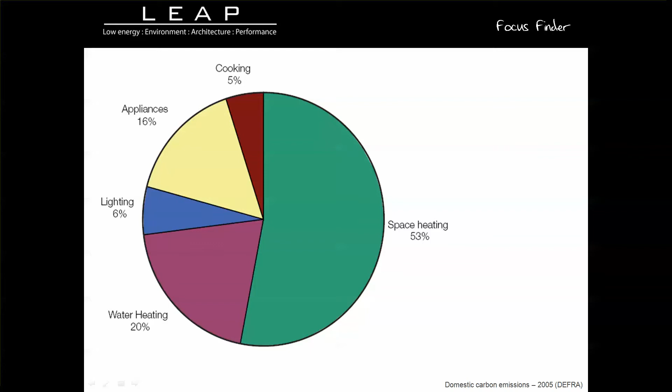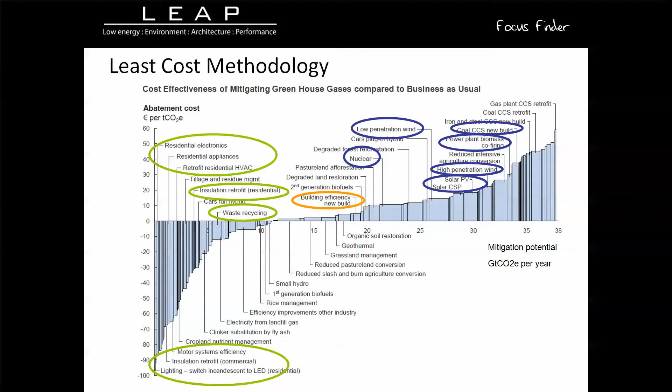And this can start to become a way of thinking about how you can actually develop some sort of fuel policy and fuel methodology, a way of reducing carbon emissions. So what you really started to see is that from the left-hand side of the graph to the right-hand side of the graph, the life cycle costs get reduced. So you start on the left, you use all of your energy efficiency measures, that releases capital, and you're then able to invest that into the fabric of a building or other carbon emissions reduction kind of approaches.

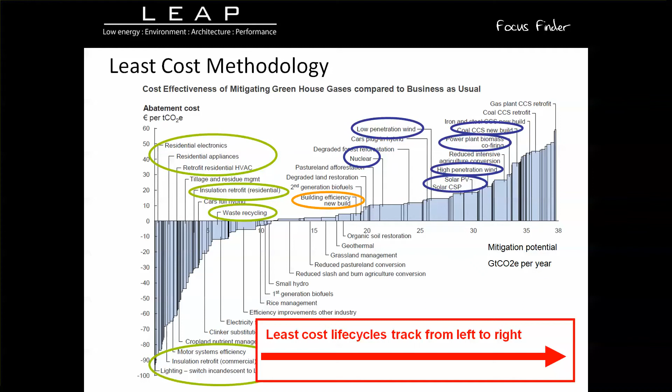So really the first thing to do is to retrofit buildings, of course, and pay close attention to that, and planning not just for heating but for electrical energy use and the likes. But when new buildings are being constructed, they should be made as energy efficient as possible.

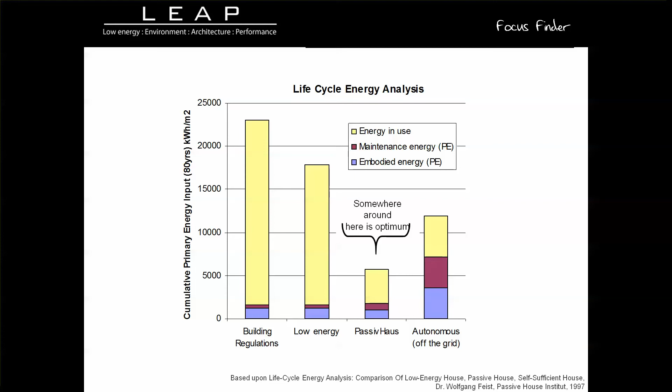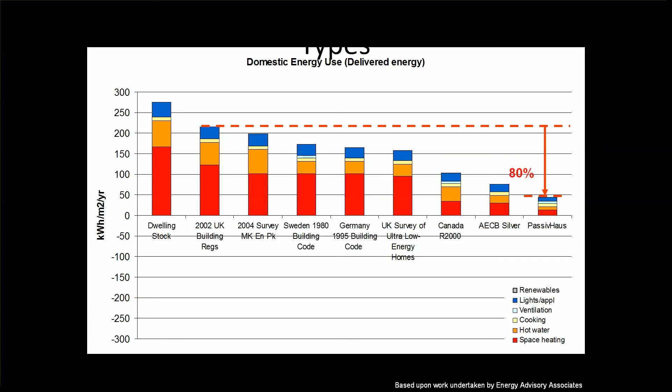So once again we've got taking on board the lessons that we learned from that McKinsey study. What we find is that we're not only reducing our energy use by 80% compared to 2002 building regs, and actually more or less, strangely enough, still compared to current day building regulations as well. And then what you're getting is least cost life cycles tracking from the left hand side towards the right hand side.

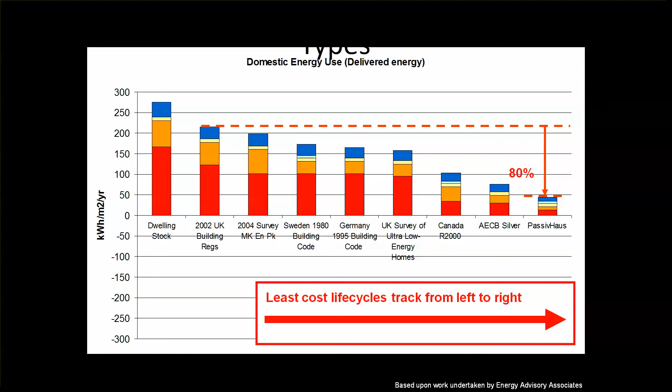When we start to look at renewable technologies, if you believe in what I feel is a mythical kind of zero carbon status, because basically it's an accountancy game, it's not reality. Until the national grid is completely zero carbon, then you'll never get a zero carbon building. If it's an off the grid building, then we've already looked at that.

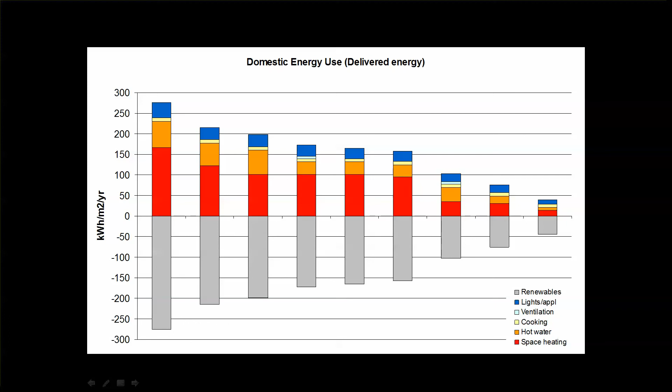Okay, so where do we go? Well, the more energy that you use, the more renewable technologies that you need to offset your carbon emissions, and that costs money. PV and the likes costs an awful lot of money, and you may be able to tap into various different subsidies and the likes that are around, but at that truer level, you're having a subsidy from somebody else to achieve something, and it's questionable in terms of that overall macroeconomic scale. And the other thing to think about is the maintenance issues associated with the bolt-on technologies.

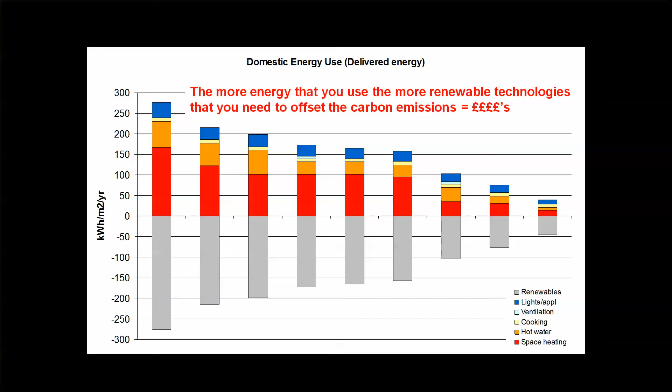And other renewable technologies. I would tend to argue that we should be sticking to something that's a little bit more simple and easy to maintain, because we've all got busy lives and the last thing we want to be doing is fiddling with other engineering bits of kit, unless of course you're an engineer, in which case you might enjoy that kind of thing.

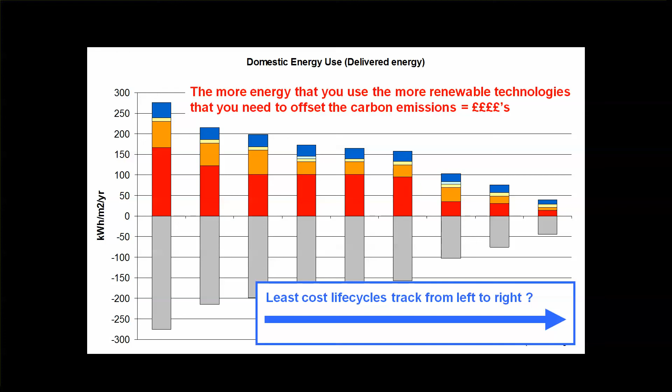So here we've got, once again, life cycles tracking from the left hand side towards the right hand side, but I'm questioning to some extent whether this zero carbon approach is what we really want to do. But I'll work with you on a project if that floats your boat. But we'll make sure that we get the fabric right in the first place, so that you're not spending your money in the wrong places.

Okay, so low energy. Low energy equals low carbon. So therefore you can have a low energy building, and by right that will have mitigated or minimised the amount of carbon emissions that it's actually making. Whereas a low carbon building doesn't necessarily mean a low energy building, because you've got biomass.

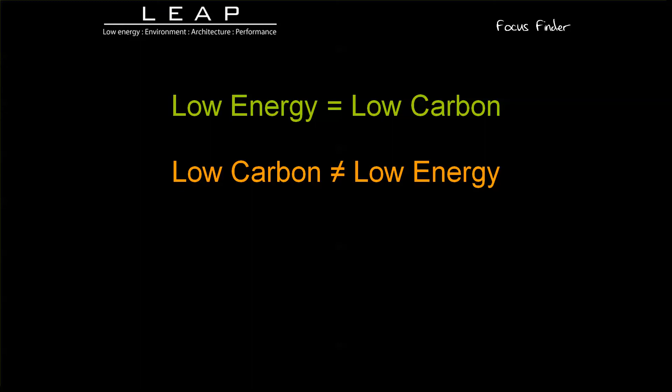You could have a very inefficient castle that's uninsulated, and you might be able to say it's zero carbon because you're burning some biomass, some wood, to compensate for those so-called carbon emissions. And it might be low carbon, but it's certainly not low energy. You're using an awful lot of energy to get there.

So therefore you've really got to question what's going on, and biomass prices are around about 30% higher than that of natural gas, so it's quite questionable as to whether you really want to go down that kind of an approach. And there are even instances of residential scenarios and things like schools where people have put in the biomass, and then the engineers have said, can we put some gas in as well?

And therefore you're now paying for two lots of heating equipment, which may then not be maintained appropriately. So you've got to question whether that's the best approach. Perhaps you're better putting that money into achieving a lower energy solution.

So what we've got here is low carbon doesn't necessarily equal a low life cycle cost, because if the cost of the biomass is that much more, then you've got to question whether that's an appropriate approach. And if you're concerned about your fuel bills and the likes, then it's certainly something to think about.

So, as I've just mentioned, there's often this requirement where you've got biomass to have a backup boiler, and that's not always the most sensible thing to do, especially when somebody decides that it's easier to switch over onto gas from day one because it's easy to maintain, and then you've gone and wasted all of that money on your biomass.

Okay, so that's a little bit of background, a bit of context, shall we say, for resource efficiency and actually thinking about how you utilise your building in some form, and the ways that you might think about designing the fabric first so that it minimises the amount of energy it uses before you start to think about other paraphernalia that you might bolt onto the roof, or actually reducing the embodied energy.